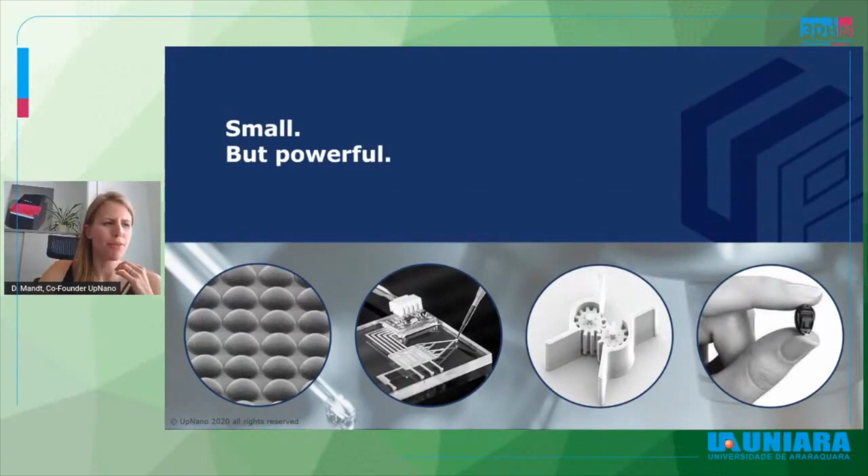Especially in medicine and bio applications, there is a lot of demand for these small applications. The technology we are providing is a 2PP based 3D printing system, fulfilling the need of this trend of miniaturization. And when we talk about high-resolution 3D printing, it is not clear which dimension we are talking about. Therefore, we came up with a quite easy idea to picture and give you an impression of the dimensions.

You basically take a normal pencil and then you sharpen this pencil, and on the tip of this pencil, you can print a whole castle. The castle on a pencil tip is the trademark of our company, UpNano. This castle is 250 micrometers in height, and therefore has all these small details. You can see the two towers, and the right tower has even pillars, and one of those pillars has a diameter of 950 nanometers, thus approximately 100 times thinner than a human hair.

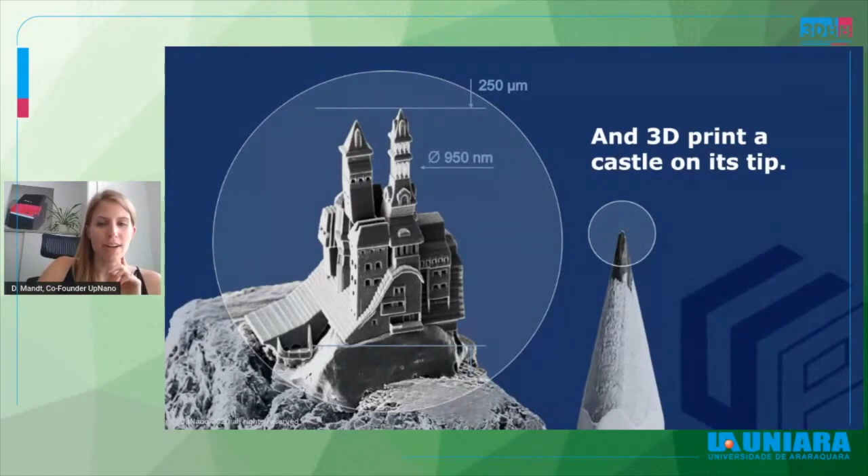So having high-resolution 3D printing, these really fine and high-defined structures can be realized. When you zoom in, you have these fine pillars, 100 times thinner than a human hair, as I just said, but nevertheless they fulfill their weight-bearing function, so they still can carry the weight of the tip of this tower.

The development of the technology we are using has taken more than a decade. All the development and innovations we put into the machine were under the slogan: small, fast, and powerful. Our aim was to not only print small structures and small features, but to also provide customers with a very small and compact printing system. It has a very small footprint, it fits on every lab bench, and needs no optical table or special equipment. The second part of the slogan is fast.

As we are a spin-off of the Technical University in Vienna, we nevertheless have quite a biological background. Our idea was to print with this 2PP technology with living cells, and therefore speed and throughput were key. Our process is up to 100 times faster compared to the market standard so far. And to achieve that, we have to be powerful — not only as a system as a whole, but also especially for our laser source. We are using a 1 watt laser source.

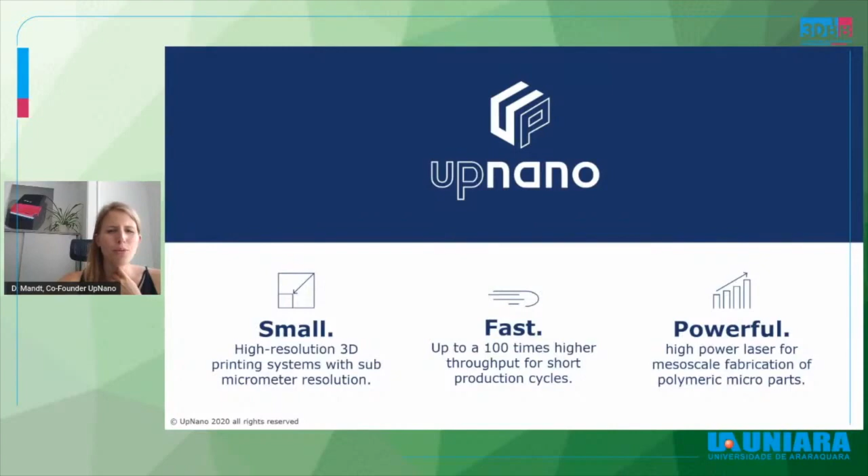Therefore we can enable these biological applications, but we can also enable mesoscale structures, so very big structures when talking about 2PP technologies. For a customer, we offer a solution from one hand: the Nano One is our key product and all the other things associated around it. We have the software, the user software, implemented in-house by our software programmers — it's a standalone software. Then we have the resins, optimized for the high printing speed. And we also offer maintenance and know-how, supporting our customers in the implementation of new ideas, project ideas, from the first sketch to the final product, basically.

When using a 2PP process, the material is hardened only in the focal point of the laser beam. Therefore, you can work within the material volume. There is no repetitive material appliance necessary.

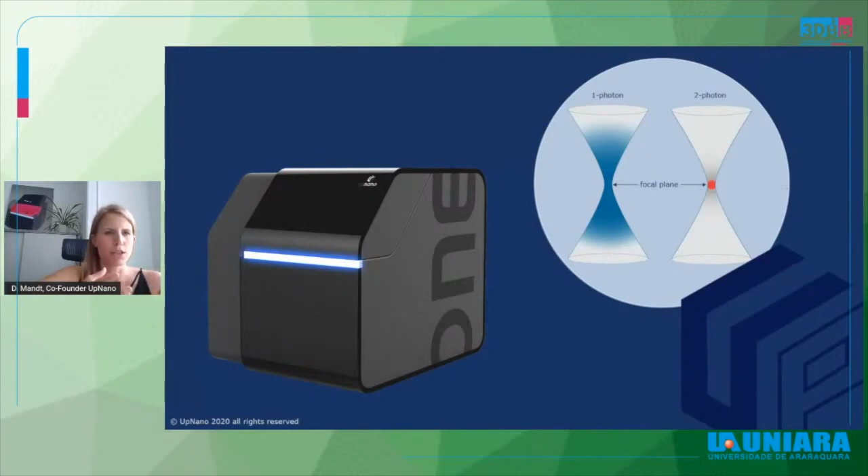While printing, the Nano One is a black box due to laser safety reasons. But we can have here now with this animation a little insight into the machine. There are different print modes. This print mode we are looking at now is the bottom-up principle.

You can use it for printing in well plates, microfluidic chips, or other vessels of choice. You put your material into the vessel, into the well plate for example. You can see this in this animation in light blue. And then the print job is done layer by layer, starting at the bottom, ending at the top.

This printing process is limited to a certain height. As you can see here, when the laser is reaching the top, the laser beam always focuses through a polymer which was already hardened. This can lead to artifacts and reflections, and therefore your parts are not true to geometry anymore. But we have a solution for that problem.

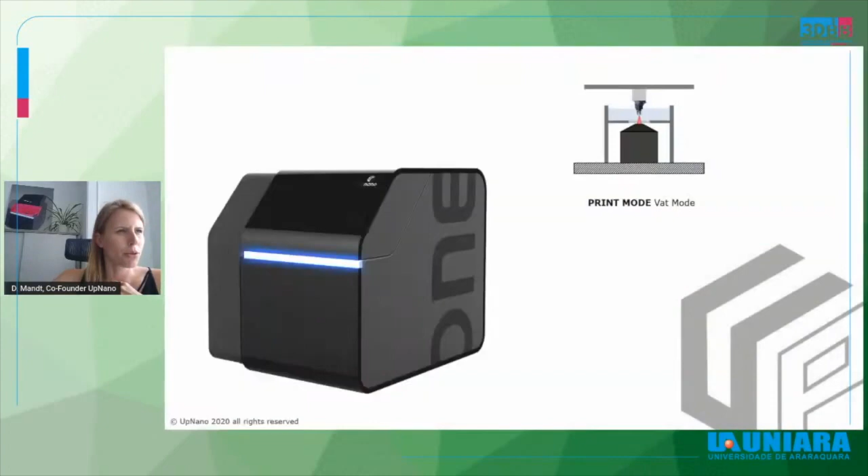Another print process is called the vat mode. Using the vat mode, you can also print higher objects. In this printing mode, a material reservoir is placed on top of the objective, and then again the structure is hardened layer by layer.

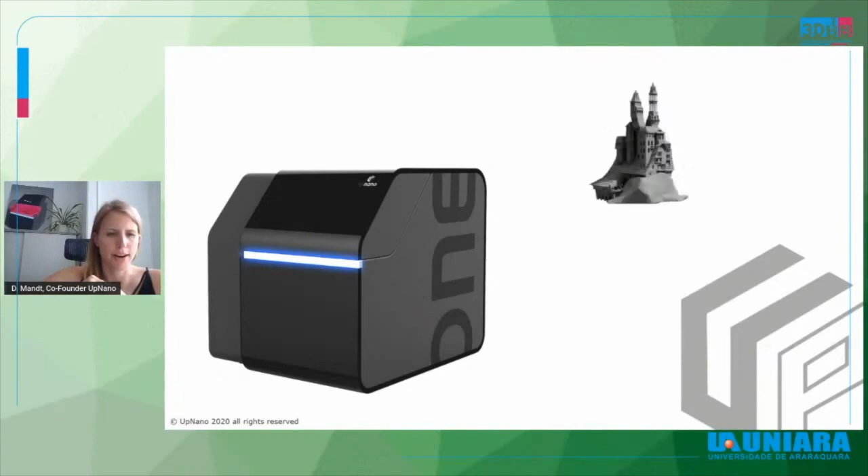But in comparison to the other mode, here the distance between the laser and the current writing layer always stays the same, and the laser is not focused through material which is already hardened. Therefore, you can achieve much higher objects. This is possible up to 45 millimeters in height.

So this basically covers the whole range, printing from micro to macro objects, with a height of up to 45 millimeters.

We have different setups depending on the substrates, smaller ones and also bigger ones, and then the corresponding vats to put the material in. The vat has a small thin glass window in the middle. This prevents contact between the objective and the material you are putting into the vat, and also preserves the focusing power of the objective.

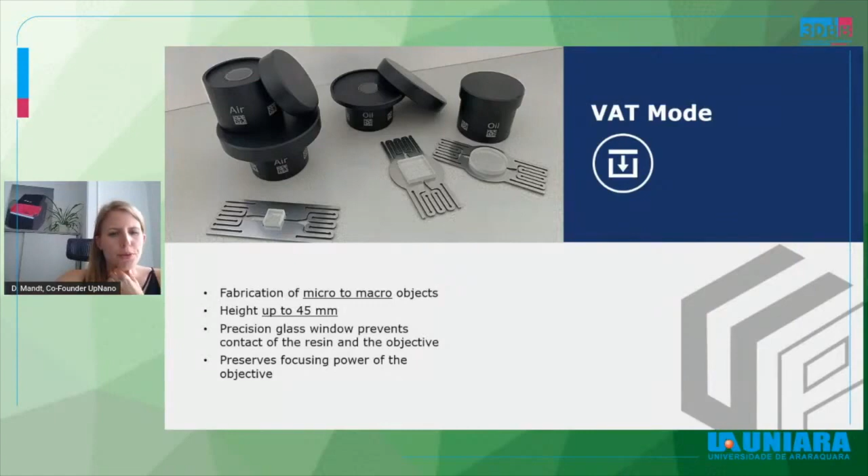As I just mentioned, we have different glass substrates we are also offering, in addition to vessels you can use like well plates, microfluidic chips, petri dishes. These glass slides are intended to be used for the vat mode. We offer a 1-inch wafer, so 25 millimeters in diameter, or two different squared glass substrates, one 20 by 20 millimeters and one 10 by 10 millimeters.

The materials, I already mentioned shortly. We are offering at the moment 3 materials which are optimized especially for the printing speed of the material. We always tend to say the fast process also needs a fast chemistry, so the chemical reaction needs to be induced quite quickly, and also the hardening reaction has to be quick.

With the UpPhoto, we are offering a universal performance material. It can print very delicate features and is very suited for the vat mode.

The UpSol is a sol-gel hybrid material consisting of organic and inorganic components. Here we can structure very complex overhanging structures, for example, because this material is gel-like at room temperature. The material is prepared, then the ethanol or alcohol is evaporated, and then you have a gel-like material where you can print in.

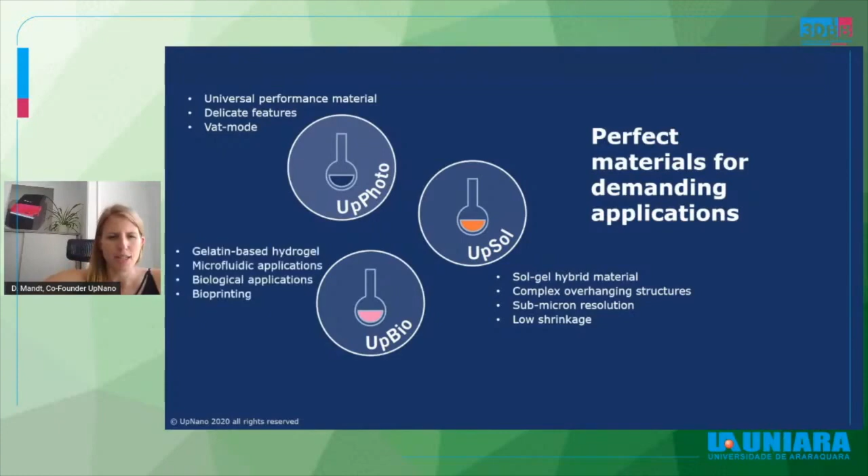And last but not least, our biomaterial, the biocompatible material, which is especially suitable for bioprinting and biofabrication approaches. This material is a gelatin-based hydrogel material with a high water content, about 80%.

This material comes as a kit, so it can be mixed together with a cell culture medium, for example, but when you do real bioprinting, it can also be mixed together with the cell solution, so that the cells are really distributed in the material. It is especially intended to be used for biological applications and real bioprinting.

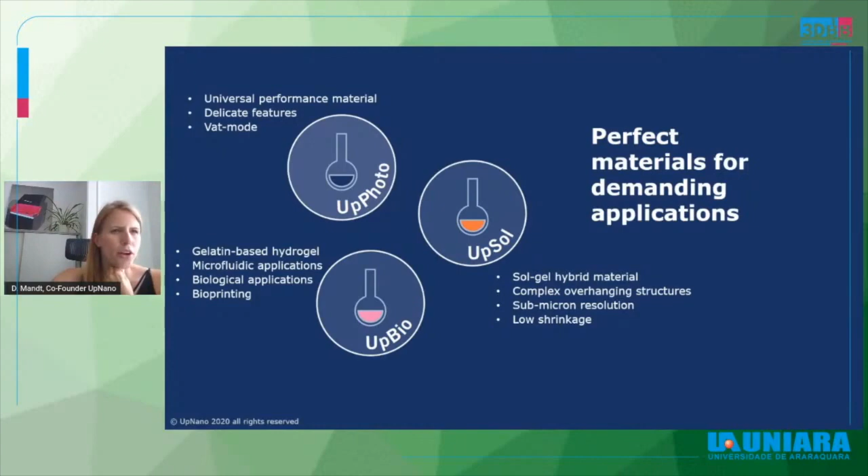With these different materials and vats, we can offer a broad range of possibilities and also sizes. We can print very meso-scale structures using a 4x objective.

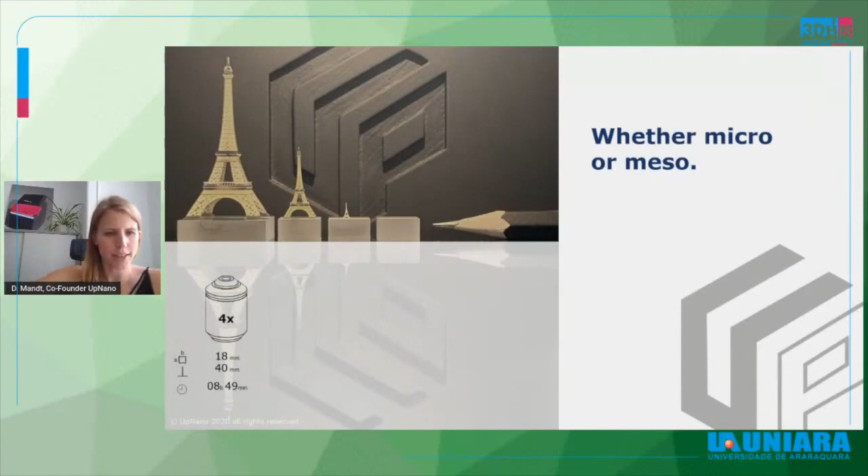For example, structures like this Eiffel Tower can be realized. It is 40 millimeters in height with a base of 18 by 18 millimeters, and was printed in only 8 hours and 49 minutes. This was printed with the vat mode, using the largest substrate, the 20 by 20 square, and the large vat.

Going down the scale, with the 10x objective, you can print smaller structures with the same features, just at a smaller scale. This image gives a visualization of what's possible with different objectives. Going down the scale, the magnification increases and the size of the objects we're printing decreases.

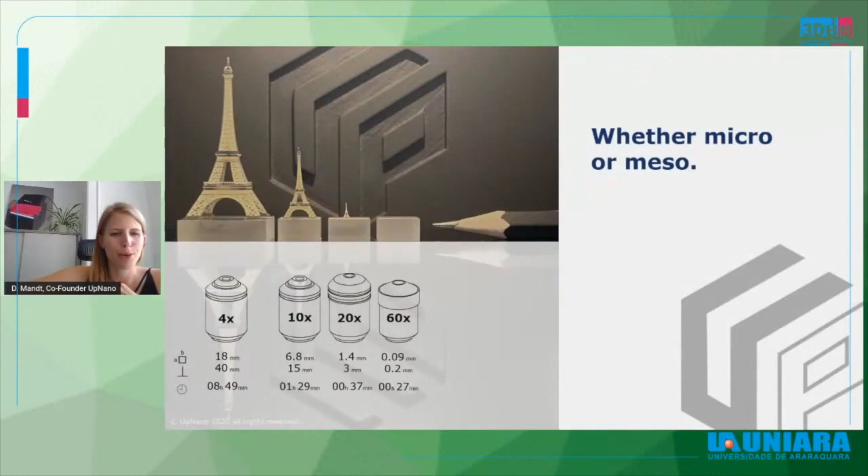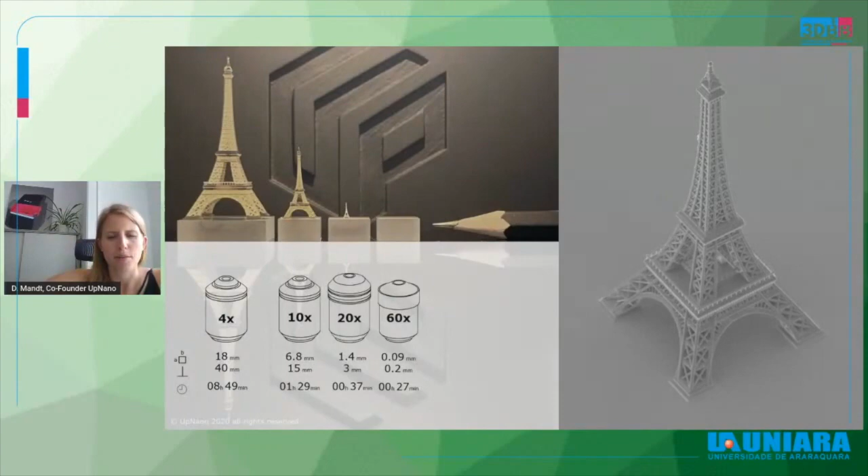Last but not least, we have the 60x objective. Here we printed a 0.2 millimeter, or 200 micrometer, height Eiffel Tower, which can't be seen anymore in a normal photo but can be seen in a scanning electron microscopic image. Again, all the small details and fine features are perfectly fabricated.

Covering this broad scale of applications, we have these different objectives. In the standard configuration, the 10x objective is an immersion-free objective with a numerical aperture of 0.4, giving it a quite large field of view.

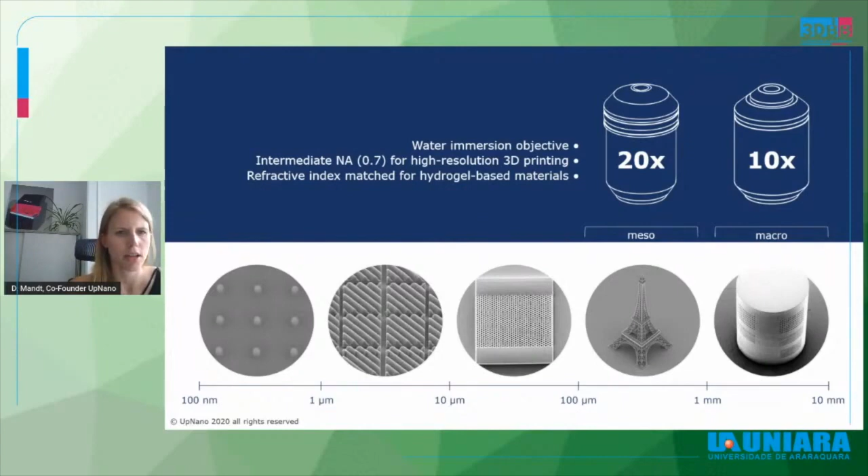The second objective, the 20x, shown here again with the Eiffel Tower example, is a water immersion objective. It has an intermediate numerical aperture of 0.7 and is intended for high resolution 3D printing applications. It can also be used refractive index matched for hydrogel materials especially - this one is very suitable.

The third is the one with the highest numerical aperture of 1.42, an oil immersion objective. It's used for ultra high resolution, with feature sizes down to approximately 170 nanometers, suitable for structuring small and very complex parts. The 60x objective isn't intended for printing cylinders like the 5 by 5 millimeter example, but really for small micro tags, as seen on the left, surface elements with defined elements on top, and grid structures.

By covering this broad range of sizes or scales, speed is one of the key features enabling this. When printing very high structures like the 40 millimeter Eiffel Tower, the speed of the process has to be in accordance so that it's still economically relevant.

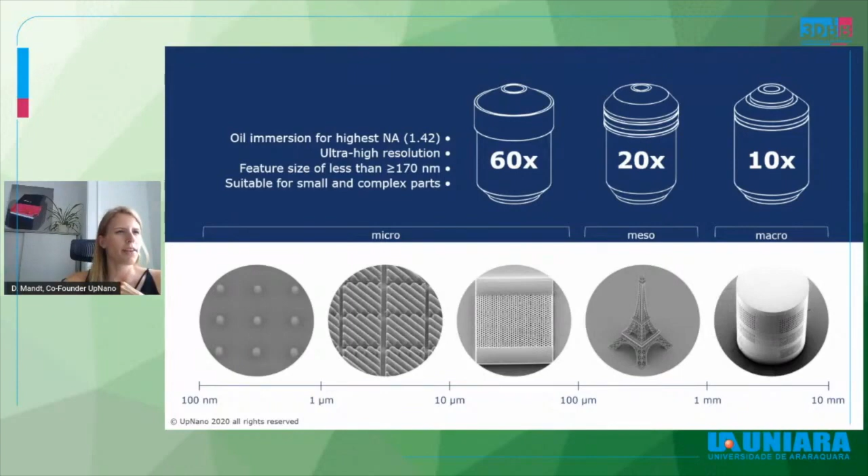When printing fine structures, even a very complex structure like the castle on the pencil tip we saw before, this structure has very fine details like pillars, windows, and small steps, but nevertheless the main material is bulk material where no resolution is needed.

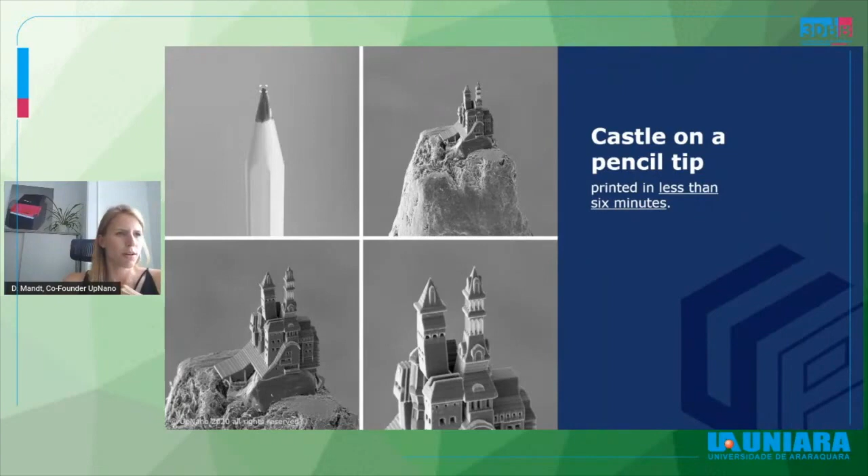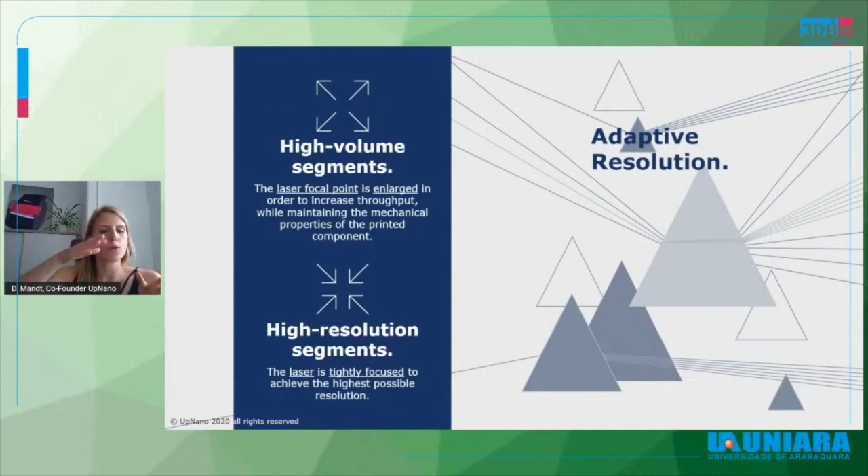Therefore, one of the key features, patented by UpNano, is the adaptive resolution process. With adaptive resolution, we can distinguish between areas of high resolution, like the pillars, windows, and stairs, and focus the laser very precisely to achieve this fine resolution and these fine features. But for the bulk material and inner material, we can enlarge the laser beam by a factor of up to 10.

And then write the inner part. We can write more volume at the same time. So when widening up the laser, the power of the laser is adjusted accordingly, because it's very important for us that we always produce solid structures, completely solid. We have no supporting grids or shell scaffold approaches here, but also the material properties have to be the same through the whole part. So when the laser beam is enlarged for the inner areas, the laser power is adjusted so that the power distribution per square remains the same. This is very important to know.

The factor, when widening up the laser, is just done in the XY direction, so the height of the voxel is not affected by the adaptive resolution. This adaptive resolution is quite powerful when it comes to the throughput of the machine, as the defined areas of the structures can be chosen individually.

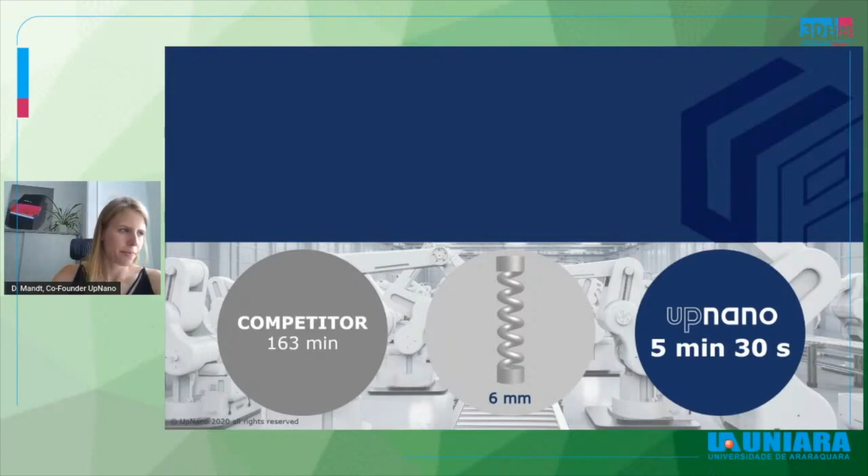And this advantage of throughput is not only due to the adaptive resolution, because that isn't really affecting things in the case of the spring, since it's just a very fragile structure. It is an interplay of different things: hardware, software, and also the chemistry behind it. So the USP is a mix of very different things.

Coming back to the software, for us it was very important to have just one software package for the customer, where he can implement all the features and parameters. With the system it's possible to place different STL files within one job, and give the different parts different parameter settings. So you can, for example, create an array where the density, printing power, or speed increases each row, making an array with different settings you can compare during your evaluation.

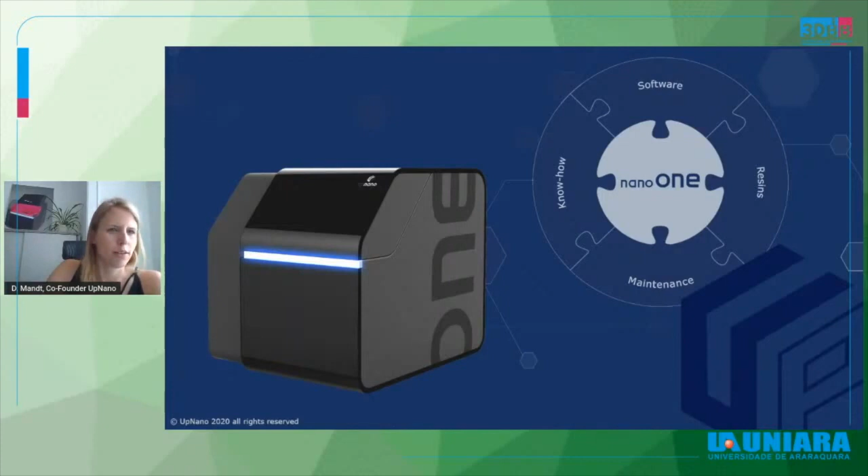But the second USP besides the speed is, of course, the potential for biological applications. As I said, with our background from the Technical University and these biological applications, it was always our goal to enable high-resolution bioprinting, and the whole system was designed and developed with these biological applications in mind.

The Nano One, as a desktop system, can be equipped, for example, with an incubation system. On the door there's a little hole or gate where the tubings and cables of the incubation system can be passed through, and then the temperature, humidity, and CO2 level of the environment can be controlled during the whole printing process, supporting or mimicking the native environment of the cells and supporting viability.

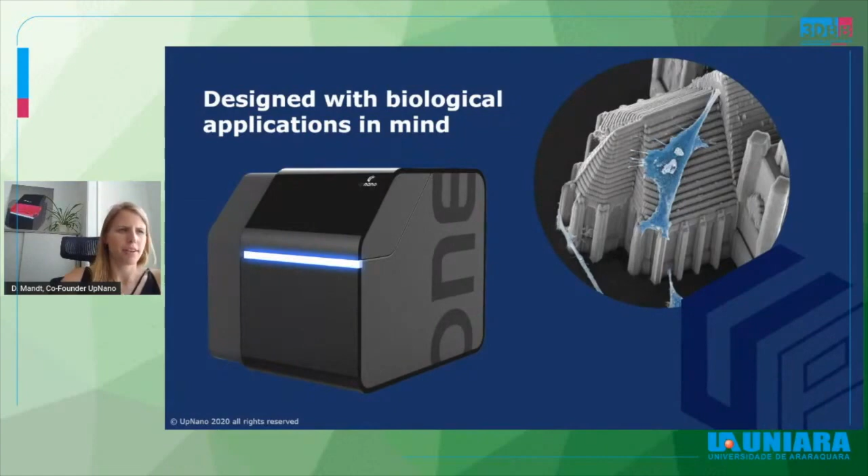So there are different stages of biological applications. We, for example, can of course produce cell scaffolds.

This is not a true bioprinting application, because you basically just produce the cages, and the cells are then combined in a second step together with these cages to end up with cell balls. These balls can again be fused, for example, to have a big agglomerate of cells and cell cages, which can be implemented, for example, in a defect area, to provide the cell power and also the support of the scaffold structure, so that on one hand there is mechanical stabilization, and on the other hand they stay in the position they are intended to stay.

This can be done in different vessels and configurations. Our goal was to be very open and very flexible. So, for example, with the right insert, you can use cell culture plates. The cell culture plate has to have a glass bottom with 170 micrometer thick glass, because all the objectives are corrected to this 170 micrometer glass. Then the scaffolds can be produced in the bottom-up approach we saw before, beginning at the bottom and ending at the top.

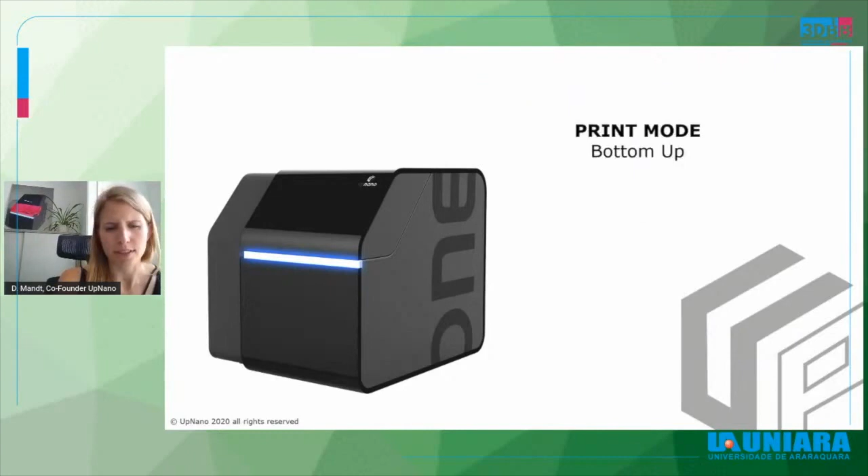Here again you can see one of these cages being printed. Here you can print an array of cages at the same time. The maximum we are printing now is above 300 of these scaffolds on the 20 by 20 substrates. Or you can, for example, use a 96 well plate and place one of these cages in each individual well. There is a software interface where you can put the STL files basically in the individual wells, and the parameters of these printed objects, the cages in that case, can be varied from well to well.

Also for us it was important that the system is equipped with a HEPA filter system. We have a filtered airstream above the building platform, which prevents contamination, for example, with dust, as dust particles are often bigger than the structures we are actually printing. When the system is open, we have clean room conditions of 1000, and when it's closed, you have no particles, and we fulfill clean room 100 requirements. The HEPA filter is on the whole time, while printing and also when opening up the system, and therefore ensures that everything is clean.

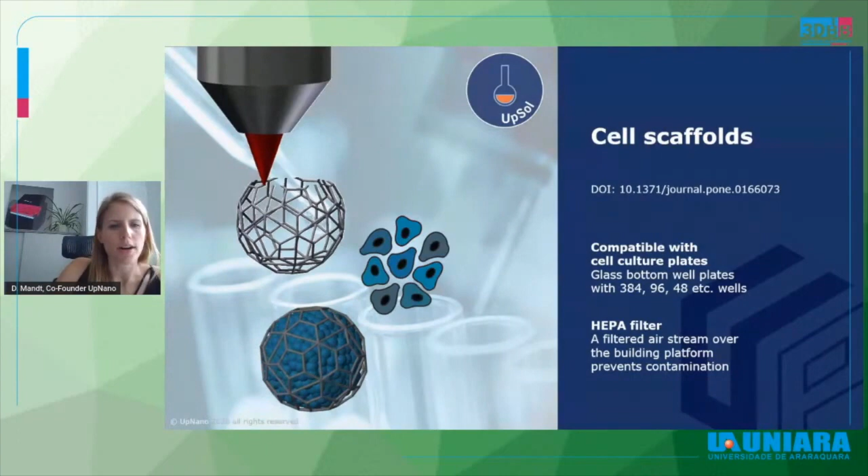This approach is, for example, done with the UpSol material, this organic and inorganic hybrid material we are offering.

The next possibility with biological applications would then be the real bioprinting approaches, as we're calling it—really embedding the cells into the material. This is done with the UpBio material, which comes as a kit, as I said before. You prepare the cell solution with the cells of choice, then mix it together with our monomer and the photoinitiator, and the cells are really distributed in this material. When printing, the material is hardened and the cells are embedded in the structure, and after the printing process, the remaining cells can be washed away.

When doing bioprinting approaches, we strongly recommend using the incubation module, or biomodule, so that you have a stage-top incubation system where the CO2, humidity, and temperature can be adjusted and controlled during the printing process. Aleksandr Ovsianikov and his group have shown several times already that with this setup and these materials, you can achieve really high resolution 3D printing approaches and realize them.

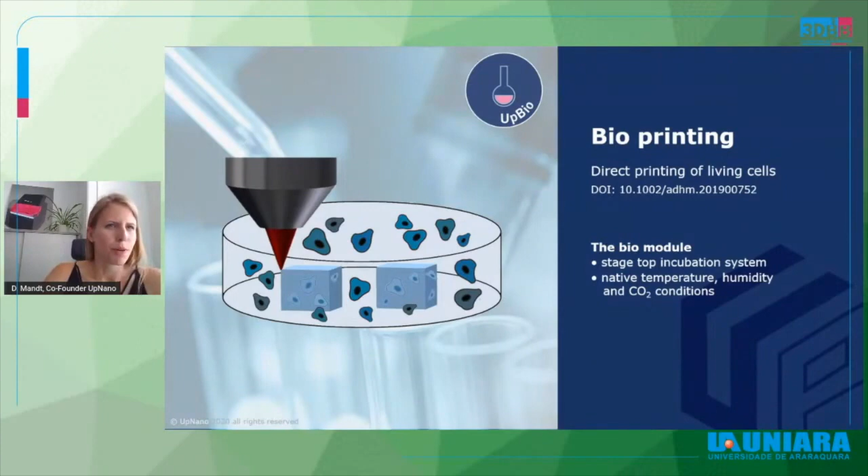Another option for printing is within special vessels, like a microfluidic chip. This can be either a custom-made microfluidic chip or a commercial one. There are a lot of manufacturers offering plastic microfluidic chip models where you apply a sticky slide with 170 micrometers on the bottom, giving you a thin glass layer the objective can be focused through.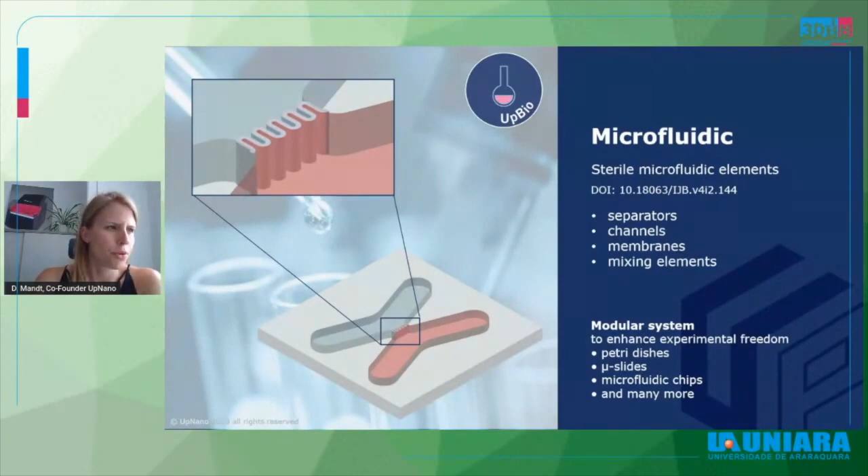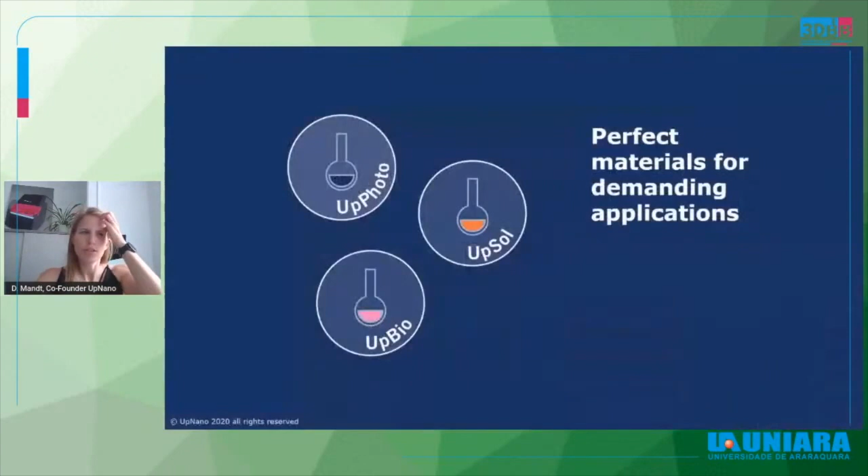When printing on the glass substrates I showed before, there are different options. You can either pre-treat them with a silane solution to ensure the parts stay bonded to the glass, or if they are very fragile and you would like to remove them from the substrate, this silanization process can be skipped so the adherence is not as strong and the structures can be removed easily. This depends on the further use of the structures and what the final application would be.

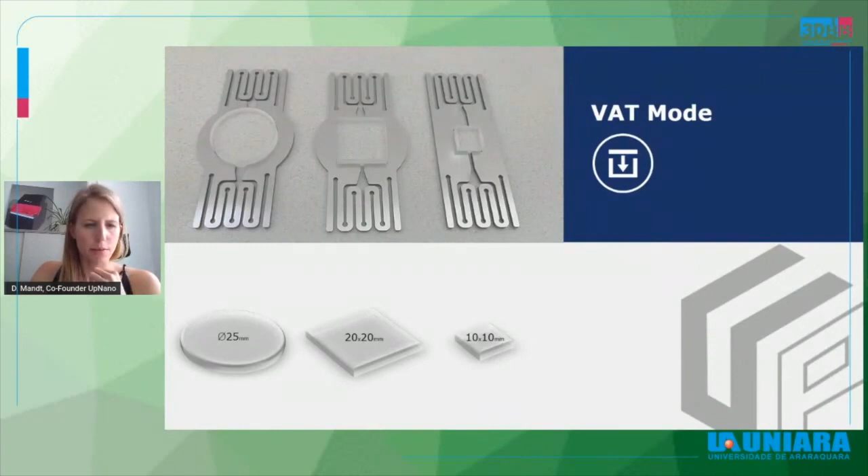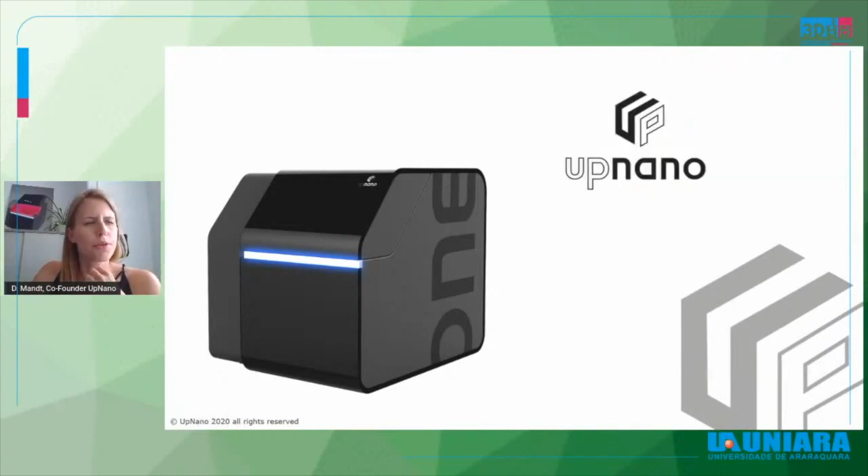When doing the bottom-up approach, so when printing within a vessel, different pre-treatments can also be done. With vessels like well plates, you can pre-treat them to get better adherence if necessary, or if this supports further processing, or you can just have it without pre-processing for structuring and for easier detachment. The only thing to consider when printing inside a vessel is that it is important to print with a glass bottom, so either a well plate with a glass bottom, or a microfluidic chip with a glass bottom, like we said before.

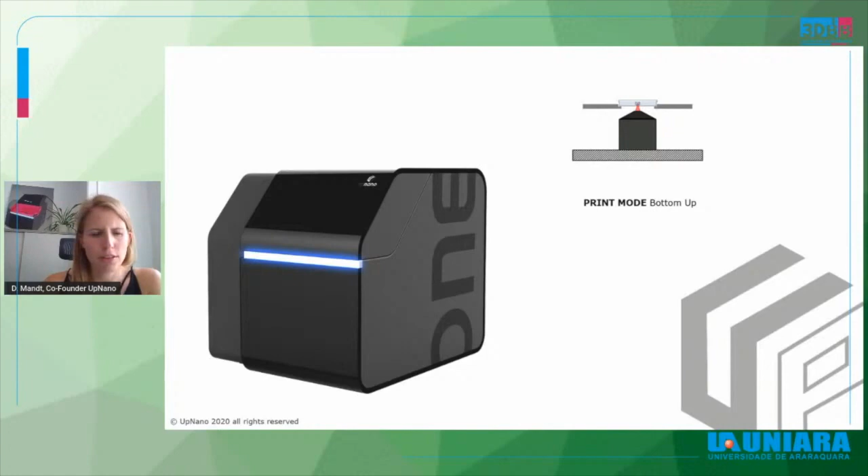To end this presentation, I would like to show you a short video quickly. One second, I just have to change the screen. It is a video of the NanoOne printing system to give you a better understanding and an idea of the things we just talked about. The video gives you an overview of where the machine can be placed and how a potential setup looks like, and also visualizes the different steps of the process. When the video player is doing what it's intended to do, you will see it in a second.

In the meantime, I can summarize the key features. There is no vibration isolation needed, so you can basically place it on a normal lab bench and have it there. It's very small in its footprint.

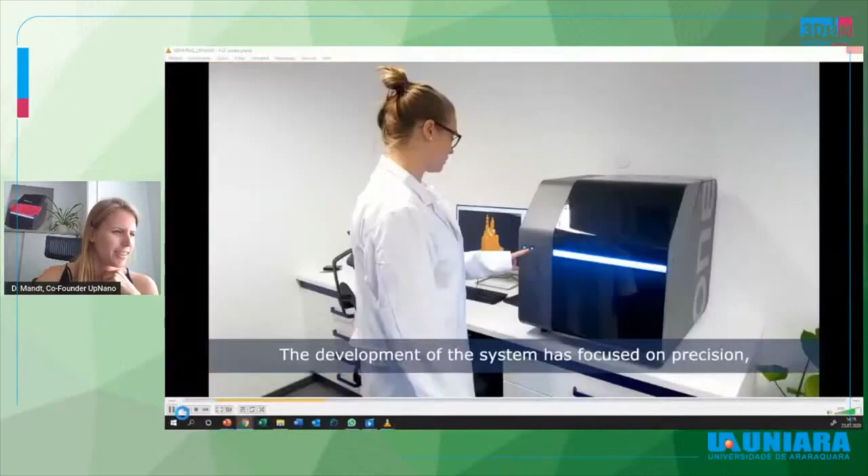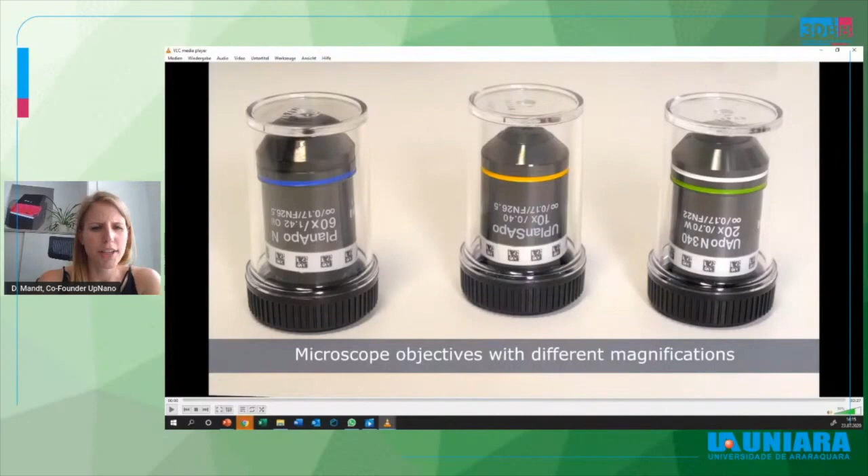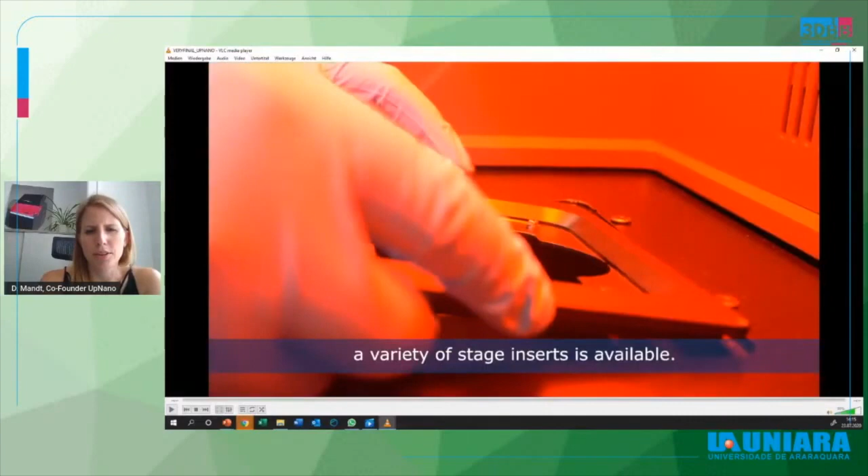At the moment you can't see the video, I think... now you can. You can see here that it is very clean in its design. We just have two buttons on the machine, opening up. All the objectives are labeled with barcodes, so the system and software can counter-check whether the right objective is set in the software corresponding with the objective inserted. Then you can click in the stage, very individually, and then place the vat on top of it.

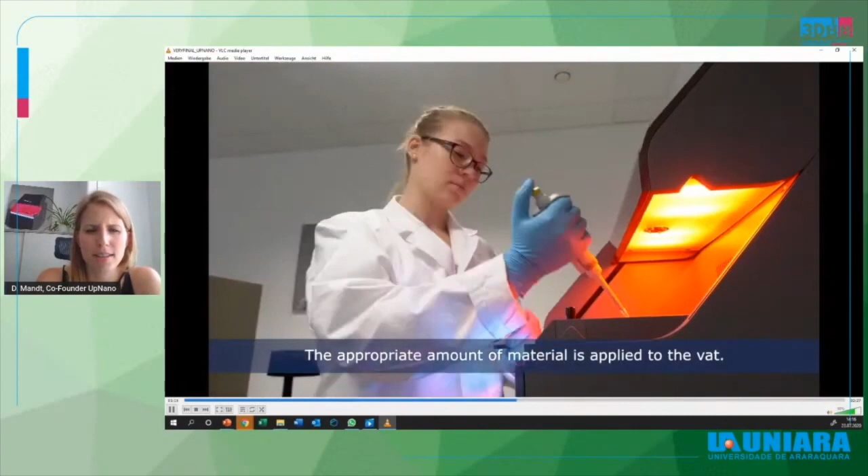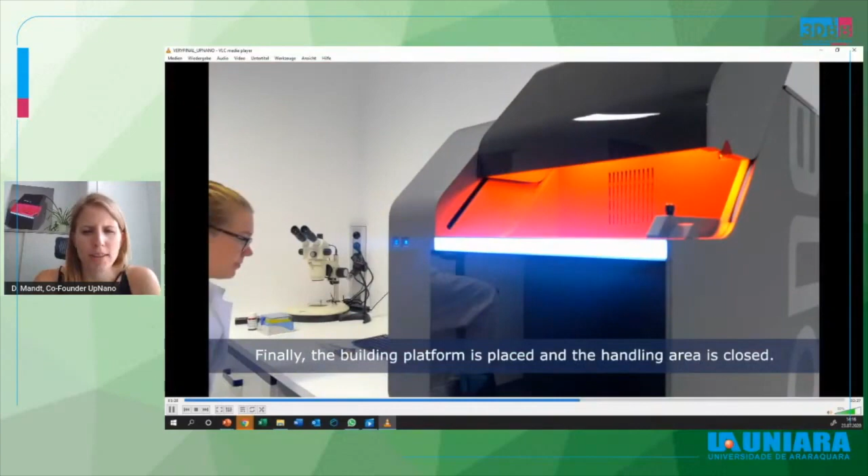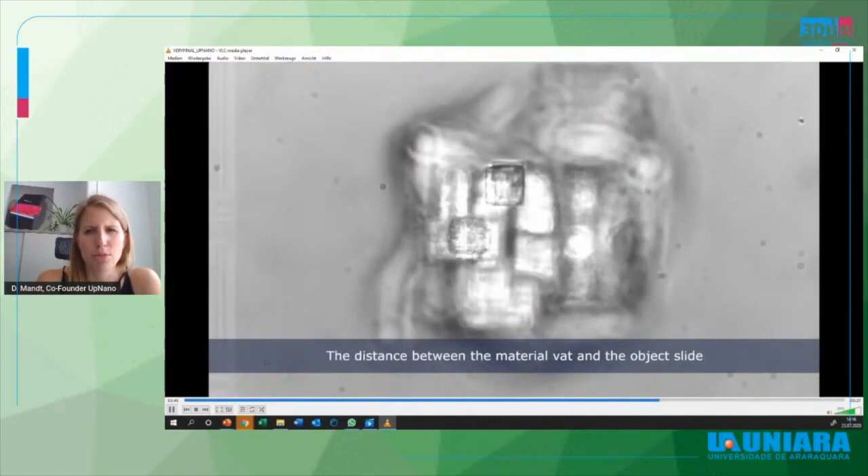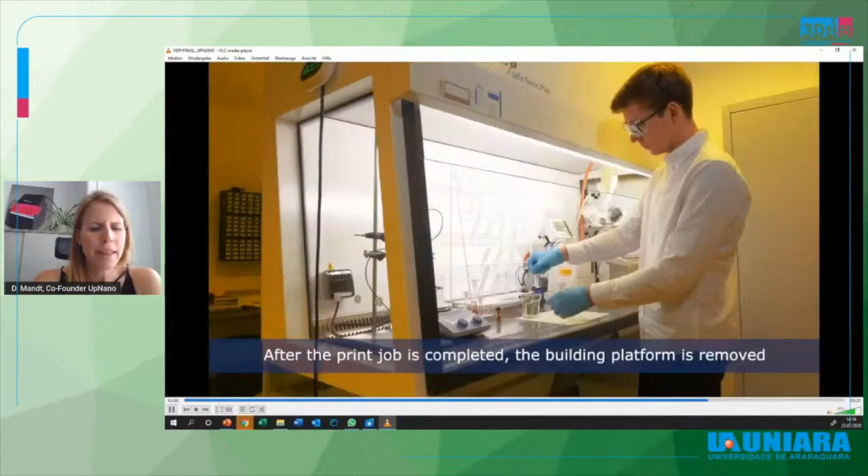What we have seen before, these glass substrates can then be fixed in. The materials, we have the UpPhoto and the UpSole I mentioned, come in brown glass bottles, and the UpBio comes as a kit, and they can be applied on top of this material bed. It's ensured that there's always enough material for the whole printing process, so the substrate size corresponds to the material volume you can apply. All the other parameters and the definition of the print job are then done via the software, so there is no interaction with the system necessary. While printing, you have two cameras: one going through the objective so you can see the current print layer, and a second camera system looking from above so you have a picture of the building platform while printing, which is especially necessary for alignment.

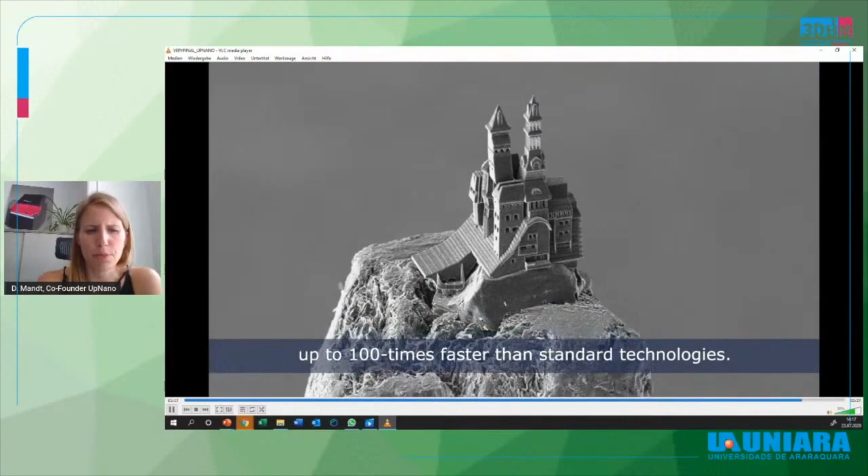After the print job, the remaining material, or the material which is not polymerized, is washed away. Then the structures can be further processed, or just imaged under a normal microscope for bigger and mesoscale structures, or under the scanning electron microscope for the very small structures.

I hope that was a good overview of all the possibilities that can be done with the NanoOne printing system. There are many different possibilities you can do, starting from bio applications in the medical field, up to some tags or filter structures, and ending up with cell and tissue applications where we really embed the cells into the printing material. So with UpNano or the NanoOne system, it's opening up a universe of applications. With that, I would like to thank you for your attention, and thank you for having me today.